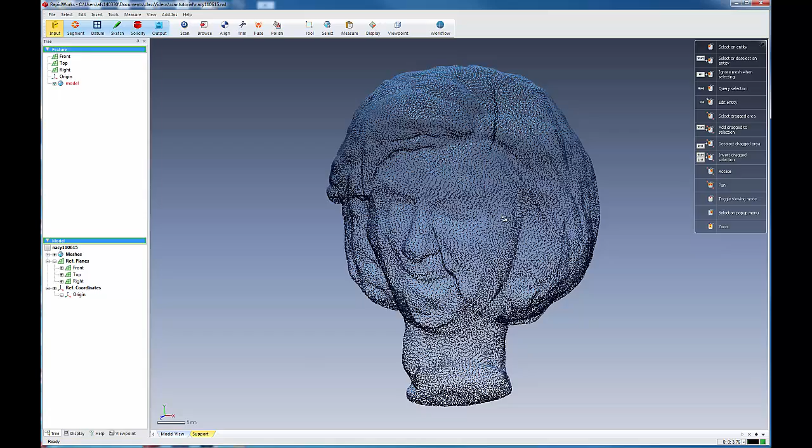Okay, now you've filled your holes and you smoothed out some of the areas of your model. Some of the things that you might want to do is just do some things that make some slight improvements upon your model. And let's look at the model in wireframe, and it's very dense mesh. And this is laid out pretty nicely, but sometimes your models aren't. The tessellation isn't even all the way around.

And one of the things that you can do to fix that is to come over into your polish area and do a global remesh, and that will equalize the distribution of the triangles within your model, and also fuse it if you need to fuse it into a single model. You can do that, and I'm going to turn on make clean and solid mesh just in case there were any holes left in the model, which I don't think there are. And I'm going to do a global remesh on this model. I'll pause while it does that.

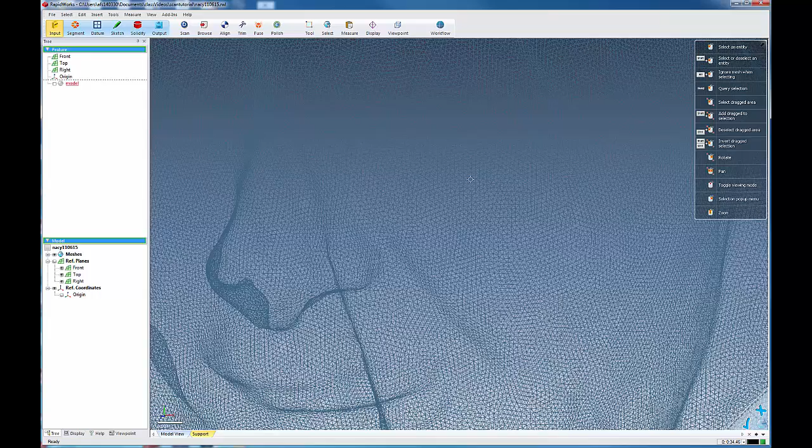Okay, and here's our global remesh. And if we were to go in and look at our wireframe, not that you'll really be able to tell, but they are distributed more evenly and cleanly. It just provides a better mesh flow, and also more than anything else, if you have overlapping meshes, it'll fuse them into a single mesh, which is often very useful.

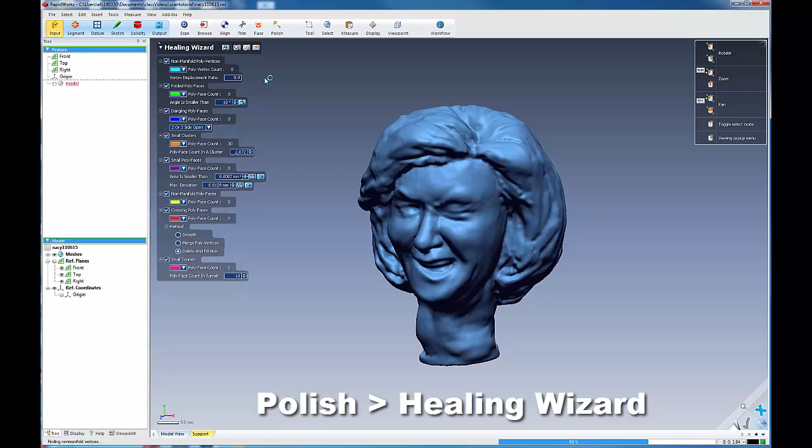Okay. Now the next thing that we want to do, since we're cleaning things up, let's run a healing wizard and find any defects that may exist in our model, and it'll tell us right here if there aren't any. We have a few small clusters, and so let's clean that up. We have a few small clusters right there. We'll get that knocked out so that we have a nice clean model. And now that our model is clean, now would be a good time to begin doing some outputs.

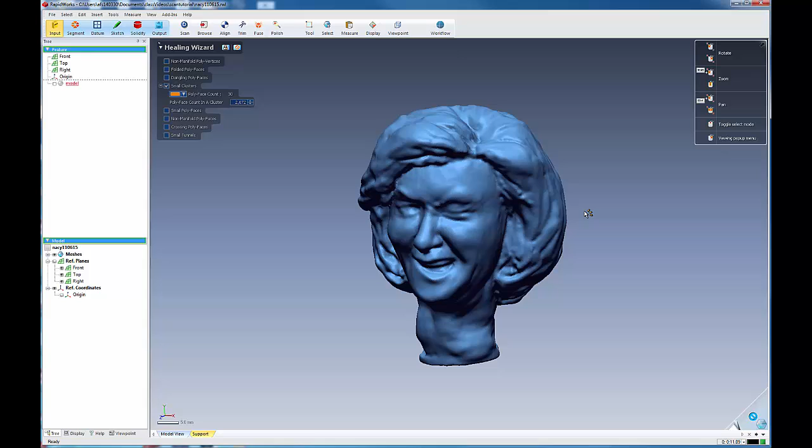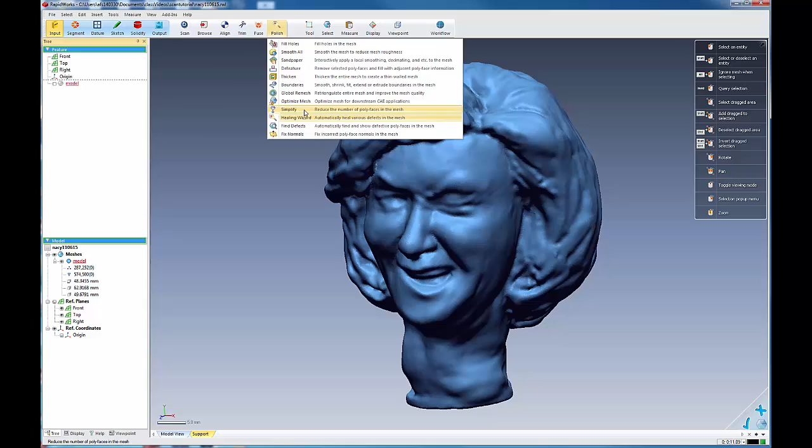Okay, and I'm going to show you how we can use the simplify, nay, decimate command to output different resolutions of our model. And so here, if we come over here to our mesh right here, and we open that up, we'll note that our model has 574,000 triangles in it. Okay, and what we can do is that we can come over here and using our polish simplify tool, we can decimate using our poly count. So one of the first things that we might want to do is we might want to have one that's 250,000.

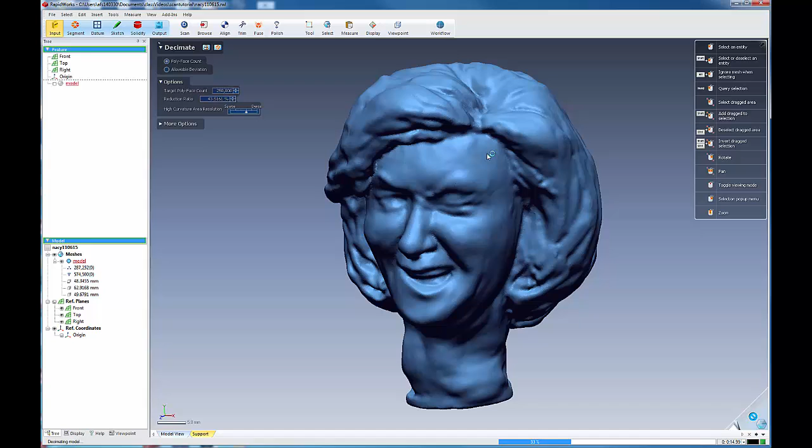Okay, and what we then do is that we'll check that through. Okay, and it's decimating the model. And once completed, it'll produce a lower poly version of the model at about 43%. Okay, and this is the model now at 250K. And it's not that big a difference, right? But it's half the size, and this is like a high resolution, medium high resolution ZBrush model.

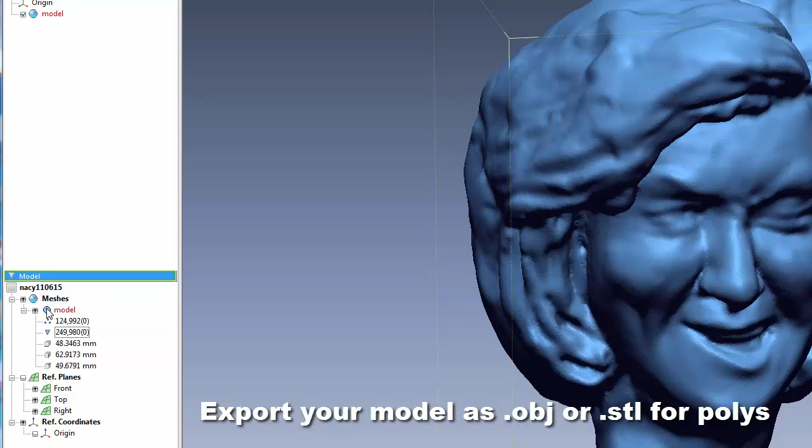And here, what I would do if I wanted to save this, you always have to check this right here to institute the change right here. And then you can come over here and do a file export, and you can save this as, I always do underscore 250K, and so that I have a 250K version of the model.

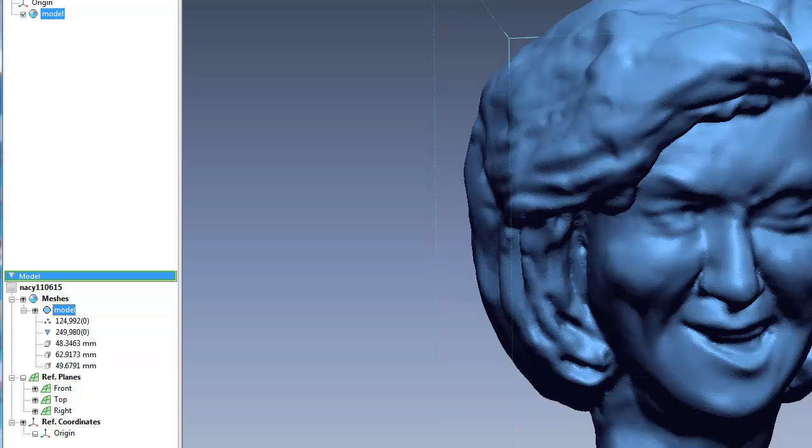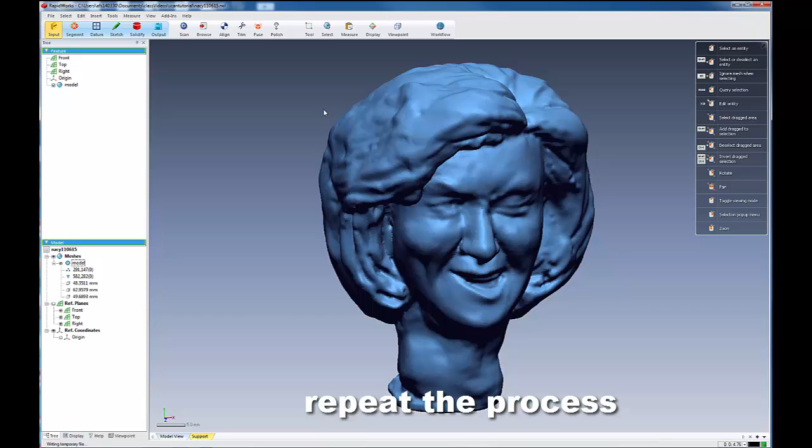And then what I like to do when I'm doing this, I'm going to output several of them. I'll do an edit undo to go back to my original model size, because I always like to work from the original model size. And now I might produce a lower level version of it, and so I'm going to go back to polish again. I'm going to go to simplify, and in this case I'm going to do a version of the model that is 5,000. I'm going to take extreme steps, or let's go 10,000. And you can do it by percentage or by ratio or by poly count. I like using poly count. And while it does this, I'm going to pause.

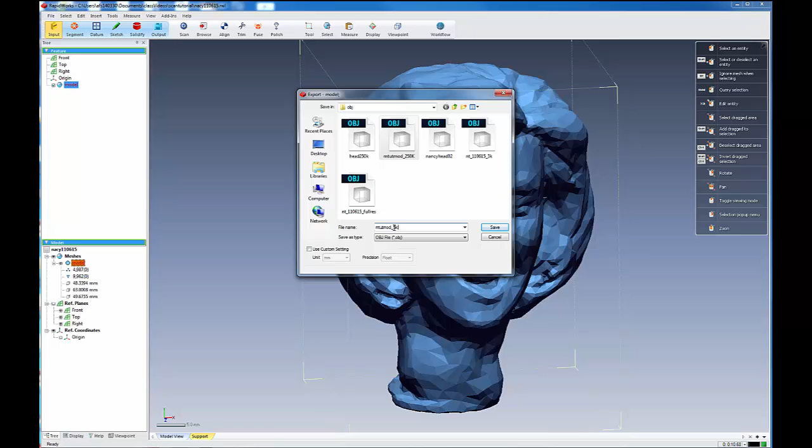Okay. And this is the resultant triangulated model. And once again, we accept the changes here. And we go over here to a meshes file. We do an export. And we're going to make that one our 5K model. And we'll save that. And once saved, we can do an edit, undo, to go back to our full resolution model.

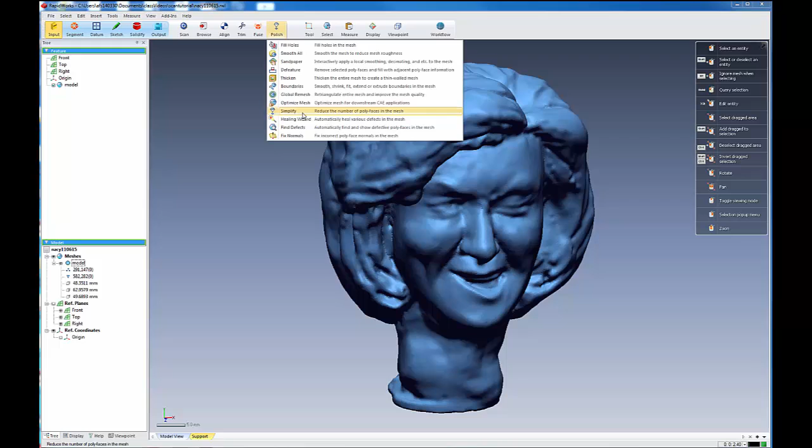And now that we're at our full resolution model, let's go to polish right here. Let's say we wanted to make one for Pepakura, which would be a low poly model. We'll come to simplify. And in this case, we're going to make the target face count 2,000 polys. And we're going to decimate that.

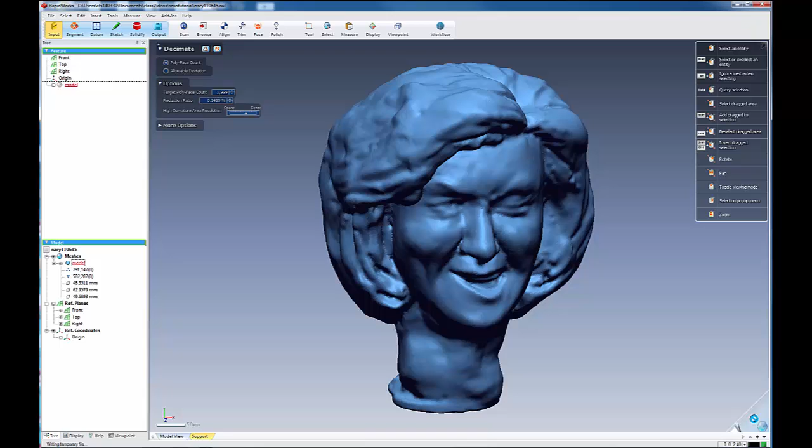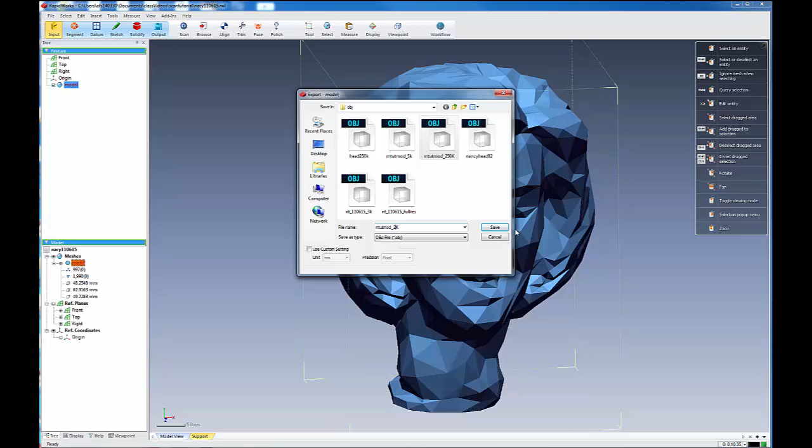And so, as you can see, using this process, we can create a variety of different expressions of the model at different resolutions for different purposes, and to make stylistic decisions with before we bring it into any of our other modeling programs that we may like to use, and so it's a really nice tool for those purposes, and that's how you output poly models. Okay, in the next tutorial we're going to talk about how we output surface models.